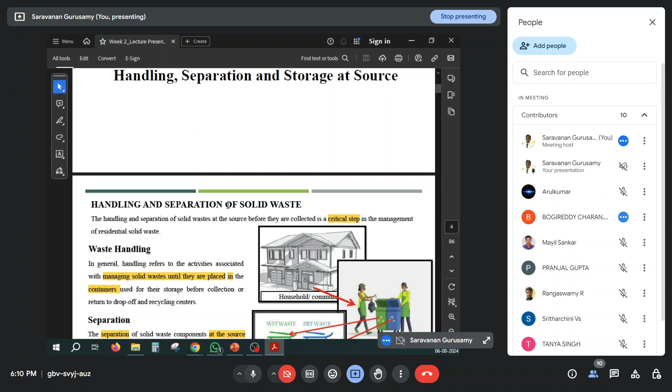So this slide discusses the handling and storage of solid waste. Waste handling is managing solid waste until it is placed in the containers. Once it is generated, until it reaches the containers or bins, how it is going to be handled in small dustbins or stored before collection, or returned to the drop-off and recycling centers.

And separation is at the source itself. It's not segregation at the material recovery facility; it is separation at the source. That's what we call source segregation. Source segregation is an important and positive aspect to achieve 100% recovery and recyclability. Once the waste is properly segregated at the source itself, it is easy to manage. That's the primary goal of solid waste management. So source separation and waste handling are very important at the source itself.

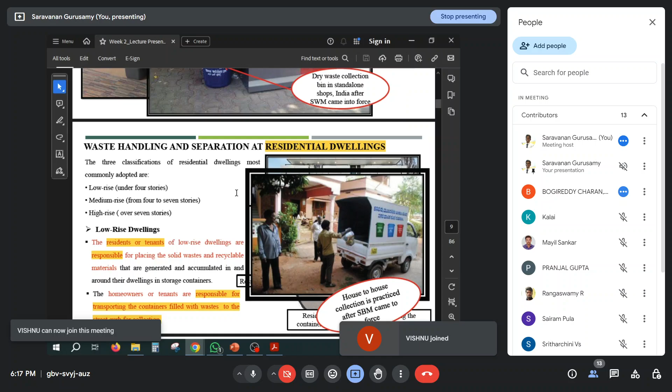So waste segregation in the commercial area, workplace, or the education institutions. So everywhere, based on Swachh Bharat mission and the fund allocated, this type of bins were placed. Yeah. Then waste handling and separation at the residential dwellings.

So as you know, dwellings is a kind of occupational area, that we will say as houses, our regular houses; that's the residential dwellings. So different types of dwellings, how to handle and separate the waste. So we have three categories. One is low rise, medium rise, and high rise buildings. So low rise is like a single house or a house with a single floor. And then medium rise buildings; high rise buildings are the apartments with the 7 stories. So these are all different categories, and how to handle waste at different dwelling areas.

So once it is a low rise dwelling, the residents or the tenants are responsible for placing the solid waste and the recyclable materials, and the homeowners and the tenants are responsible for transporting the container with waste to the street curbs for collection. Those who are in the villages or small municipal areas, they will know. When they are in single story buildings, the residents only will take the waste to the street, discard the waste in the vehicle, and then get back the bin to their respective home. So the residents or the tenants are responsible in low-rise dwellings.

So in the picture also you can see house to house collection is practiced, and the residents are coming and discarding the waste in the respective vehicle and taking back the bin to their respective homes. If it is a low and medium rise building like a 3-story or 4-story building, they have a separate waste collection system at the basement area. I mean the ground floor or G-1 floor, they have a separate area for waste storage, that's called basement storage, or outdoor storage, or occasionally compactor storage also they are following.

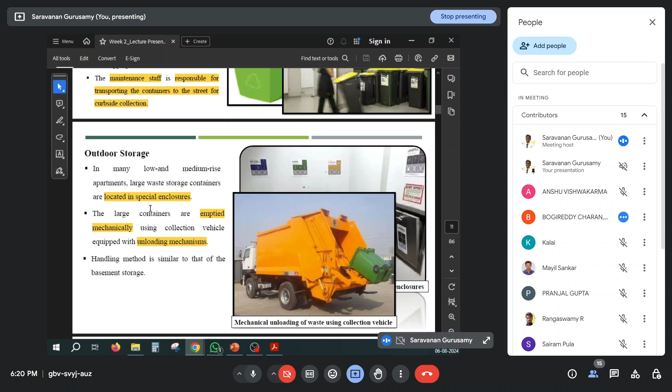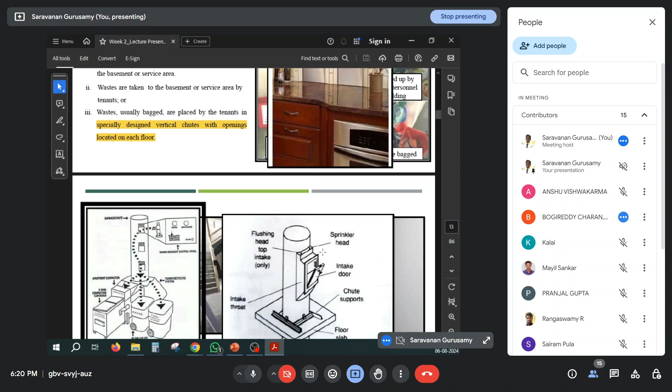Because if it is a single home, the people can easily carry the dustbin and empty it in the container. But if it is an apartment, the bin will be bigger in size and that should be handled mechanically. Yeah. If it is a high-rise building, like more than 7-story buildings, then they have a separate chute mechanism. So chute is the one which has an opening at your home itself, and you have to discard the waste at this opening. It will reach the basement or separate premises by a long elongated pipe mechanism. So these are all different buildings. Here one story, here one story, another one story.

So the people are simply discarding the waste into the chute, that is called a garbage chute. The chute will transport the discarded waste and it will be segregated at the basement area in different categories like paper, cans, plastics, and food waste. They will discard separately. So these are the mechanisms in the high-rise buildings. Yeah.

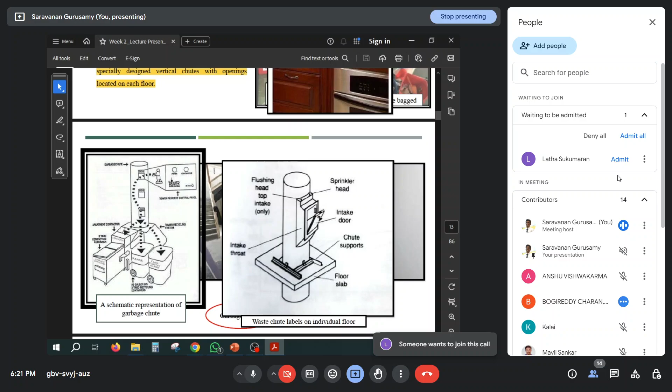How to store the waste? Now we have discussed how the waste is collected at the source itself. Now we are going to discuss how to store the waste. So storage will be affected by 4 factors. One is waste component. What is the type of waste? If it is food waste, we have to maintain it separately. If it is dry waste, we have to maintain it separately. And then type of containers. If it is a small container, it should be handled separately. If it is a big container, there should be a separate mechanical system required to unload the dustbins or the containers.

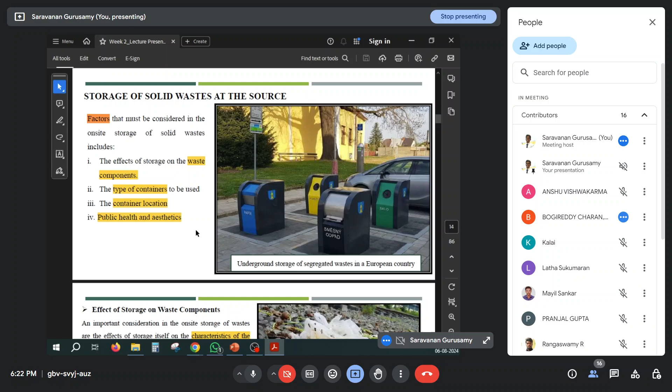And then container location. If the container is there within 250 meters interval, then the people will easily go and discard their waste in the containers. If the container location is far away, then the people will discard in the nearby area itself. So container location plays a major role. And then public health and aesthetics. These are the factors that should be considered for on-site storage. So if it is a disease-prone area, the container location should be outside the city. Then the people can be protected from infections.

So, effect of storage on the waste component: based on the characteristics of the waste, biological or microbial decomposition may happen in the organic waste, and it will form odors. It will attract flies, as I mentioned. It will create infections. Absorption of fluids: moisture from the waste will spread everywhere, and once the wet waste is mixed with the dry waste, the moisture from the wet waste will be absorbed by the plastics or papers, so they will also get contaminated. They cannot be recycled. So that is one problem, spreading of moisture.

Then it will reduce the value of individual components for recycling. Whatever could be recycled, the value of the recyclable will reduce once it gets contaminated with the other type of waste. Because of this problem, house-to-house collection of segregated waste is practiced after the Swachh Bharat mission came into force.

Then, type of containers. In this, we have two major classifications: one is the hauled container system, another is the stationary container system. When the container itself is taken by the vehicle to the disposal area or a material recovery facility, discarded there, and the container returned back to the place, it is called a hauled container system. The container itself is hauled. In a stationary container system, the vehicle will come to the location of the container, only empty the waste in the container, and return the container to its original place. The container will be stationary at the place itself. It won't move. But in the hauled container system, the whole container will be lifted onto the vehicle and transported to the disposal area.

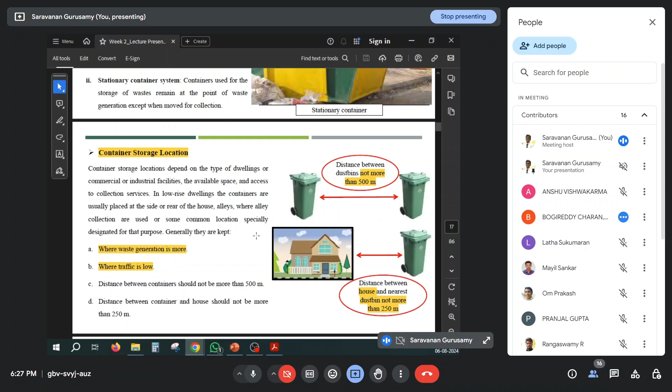Distance between containers will also be taken care of while designing container storage locations. Another factor is public health and aesthetics. Infection prone areas we have to avoid for container locations, since solid waste with vermin and insects often serves as a potential disease vector.

Some solutions include proper sanitation. You can see here how waste was collected underground using waste collection bins in Europe, with lids and periodic washing. Proper closure of the containers is a major aim, because if the container is not closed, it will automatically create an aesthetic issue and spread diseases through vectors.

You have to properly lid the container with tight lids, and periodically wash the containers and storage area using the municipal crew. Aesthetic consideration should also be taken care of.

Here comes container capacity - how much capacity should be for a container. For a single household family with 5 members, a container of 12 to 15 liters is enough. You can assume how much it will be - 12 to 15 liters is like half a bucket, it's like a normal dustbin size.

For each dry and wet waste, that is important. So you have to have one blue bin and one green bin for dry waste and wet waste respectively, each of 12 to 15 liter capacity.

If the collection takes place daily, that is another important factor. If collection happens only once every 2 days, then the capacity of the container should be doubled. So once collection is happening daily, with a 5 member single household family, for each dry and wet waste we can have 12 to 15 liter containers.

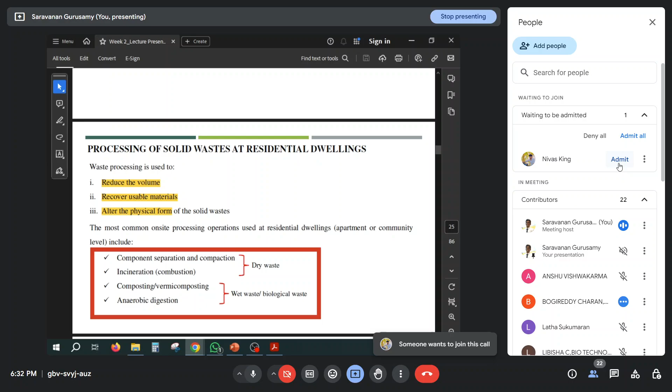First, component separation, as I mentioned for dry waste. Recoverable and reusable materials can be separated at the source itself to recover energy and convert the products. This can be easily achieved by source segregation. If it is mixed with wet waste, we can't recycle it. So dry waste should be segregated at the source itself. This is a major point I will repeat in all the slides: source segregation is very important.

From an economic point of view, at a household level, it's uneconomical at the small scale. But at a community level, you can think about source segregation and compaction.

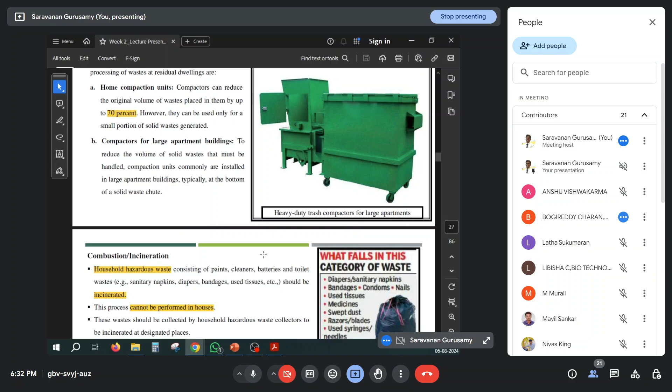In India, you can see lots of what we call kabadi walas. Kabadi walas come to your home and collect recoverables like glass bottles and plastics. Our mothers easily give this type of waste and earn some money. This type of household segregation and recycling could be achieved through source segregation.

Then compaction at the home itself. If it's high-rise buildings, we can easily compact the waste, reducing its original volume by 70%. As mentioned, 100 kg can be reduced to 30 kg by compaction, and it can be easily transported. Once the volume is 100 cubic meters, the container or vehicle required for transport of the solid waste will be huge. So if you compact the waste, it can be easily transported.

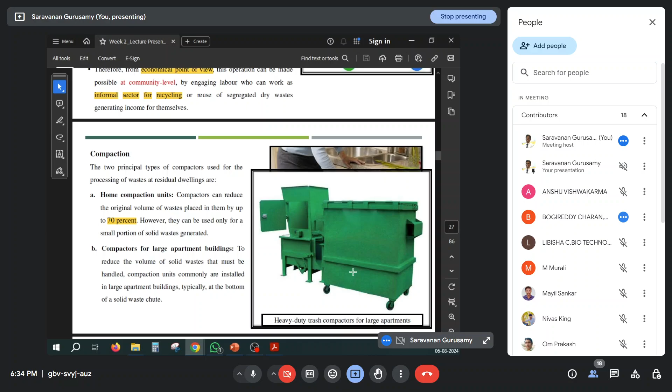Then compactors for large apartment buildings and small apartment buildings, you can see these images: heavy duty trash compactors, and then shredders. Shredding and compacting is also followed in high-rise apartments. So this is one option, source segregation and compaction, for dry waste.

Another dry waste option is combustion or incineration. This can be followed for domestic hazardous waste, that is, household hazardous waste in the yellow bins. The only option for hazardous waste is to combust or incinerate it, because it can easily spread diseases and contaminate other waste due to toxic contaminants. So the only way to manage hazardous waste is by incineration or combustion, to make it ash and reduce the toxic elements present in it.

This cannot be performed at the household level. At a community level, a municipality can design an incineration plant. So once the waste is collected in the yellow bin, it can be easily transported to the incineration plant. The process technology for sanitary waste includes incineration and autoclaving.

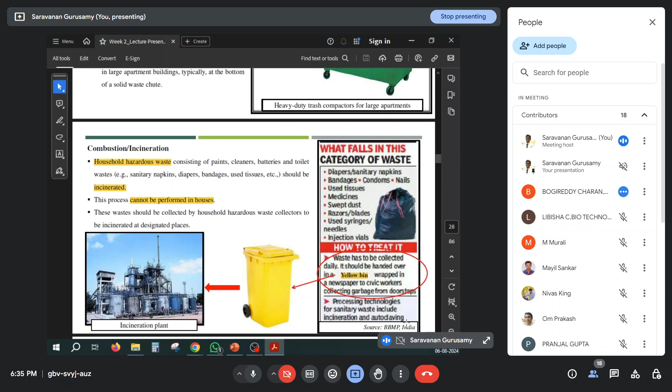As you all know, autoclaving is a technology using high pressure and high temperature. It's a sanitation method to inactivate the microbes present in the solid waste, so there won't be any biological or infectious bacteria or virus remaining active. That's the process of autoclaving - at high pressure and high temperature, we can reduce the activity of the microbes.

So that's all about dry waste. For wet waste or organic waste, we can adopt composting. You all know what composting is - it's the process of degradation of solid waste, or the organic fraction of solid waste, by the use of microbes. So microbes will degrade the organic fraction of solid waste. There are two options.

One is with oxygen, another one is without oxygen. If it is with oxygen, it is called composting, or without oxygen, it is called anaerobic digestion. So that's the difference.

So here we are producing a product that is called compost. This is a good soil enricher.

We can use it, we can apply in the agricultural field to improve the fertility of the soil. So we can do this type of composting in the household or community level also. So many village panchayats or many municipalities are having compost plants. In my hometown itself, we have 3 compost plants.

You can also visit a compost plant in your premises, in your hometown, or you can also visit the compost plant in your institution. In NIT Trichy, we have a compost plant. So we can also go there, and they are doing it for hostel food waste and garden waste, that is the fallen leaves. And then we have a horticulture garden.

So there also, whatever waste they are getting will be treated in the compost plant only. We are getting compost as a byproduct that we are again applying in the garden itself to enrich the soil fertility. So there are 3 stages.

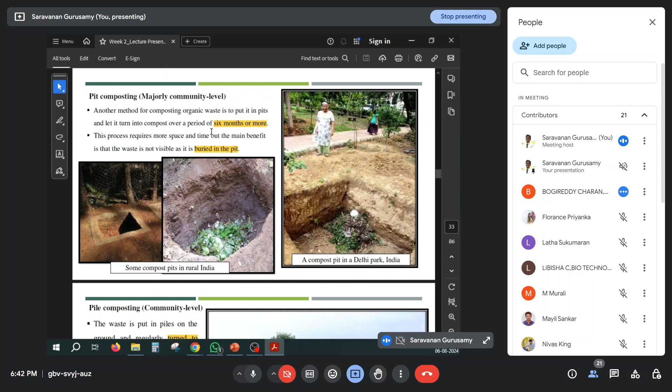This will reduce the volume of waste to be collected and treated, and the volume of waste reaching the dump site will also be reduced. So this is a good practice if you have a large backyard. This is called pit composting; we can also do it at the community level, but it will take lots of time because the waste is buried and has no oxygen supply, so it will take 6 months or more to become compost.

Then pile composting. Pile composting we can do at the community level. The waste is spread in the form of a cone, extended over a length, and turned every day with a separate piece of equipment called a turner, or shaker. The waste is turned every day to allow proper aeration. It will have a width of 1 to 2 meters on each side and not more than 1.5 meters in height.

In Germany, you can see this type; another name for this is windrow composting. The shape we call a windrow. So this is windrow or pile composting, which we can do at the community level. So these are the four composting types we have discussed.

What are the advantages and disadvantages of household level composting? First is household compost production, a byproduct we are producing, and it will encourage organic farming and reduce the amount of waste that needs to be collected and managed. As I mentioned, the waste disposed in the dump site will get reduced once we adopt this kind of source treatment.

And the remaining waste is clean and easier to recycle. Once the organic waste is collected in a separate bin and composted, only the dry waste will be collected by the municipal crew, and it can be easily treated and recycled. So that is one advantage.

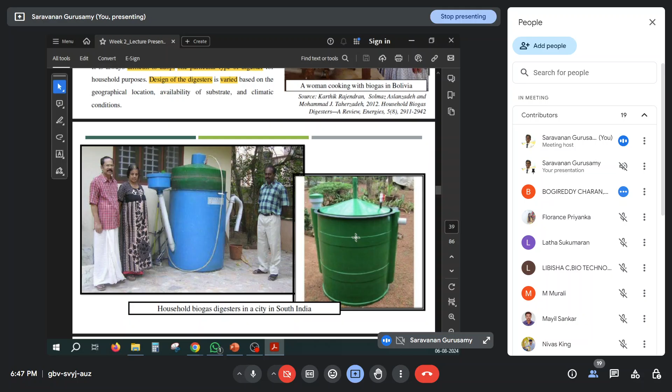You can see here a biogas digester in a city of South India. This is one type of household biogas digester. And here you can see a community level floating drum biogas plant. The gas will be collected at the top, and it can be transported through a pipe to the kitchen to be used as a fuel. At the community level, there will be a floating drum because the amount of methane produced will be more. So it can be collected in an iron drum, floating on water at the bottom.

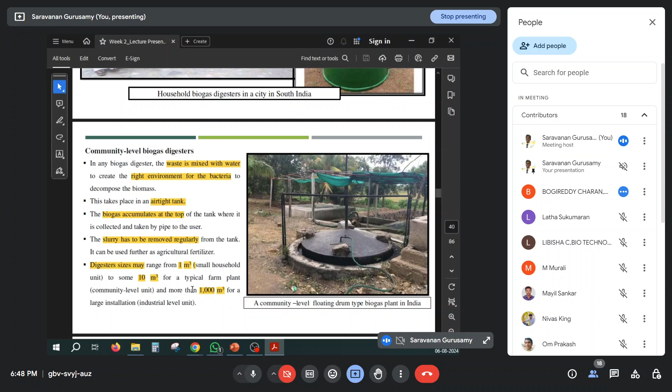Whenever the methane rises, it will raise the cylinder to the top, and the gas can be collected through the pipe. Again, it will drop down. This is the basic principle of the floating drum type biogas plant. Here you can see numericals, like what size and height it should be. Proper mixing of water is required for an anaerobic digester, and the right kind of environment for the bacteria. It should be airtight because it is anaerobic; the biogas accumulates at the top, and the slurry can be removed from the bottom regularly. This slurry is rich in microorganisms and can be used as a compost.

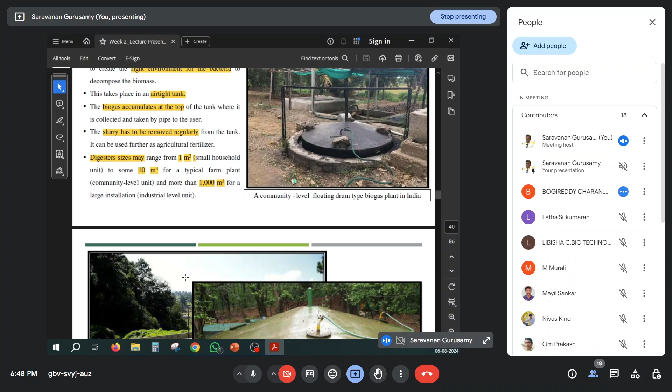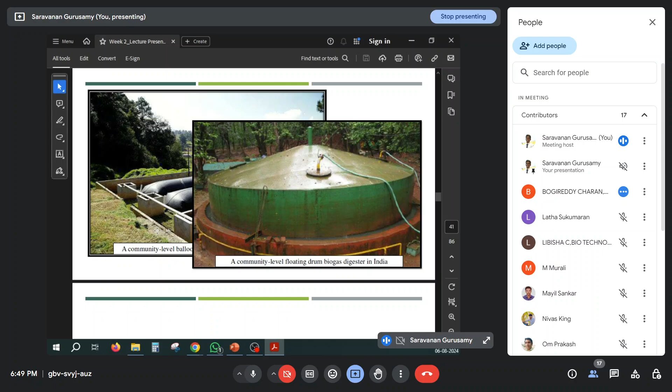And this is another community level floating drum biogas digester. Here you can see water at the circumference, and inside you can see a mixture of waste and water in anaerobic condition. The drum floats to the top because it has a huge accumulation of methane. Then the methane is collected through the pipe into a separate bag, in the back side. You can see balloons. In balloons also we can collect this methane, and it can be transported easily.

So now we have discussed how the container can be designed and how to design the location of the container. Then we discussed how to treat the waste at the source itself, if it is wet waste or dry waste. Then after treatment, how to collect whatever leftovers, through primary collection and secondary collection, we are going to discuss.

So here we are going to discuss the collection vehicles and the collection system. Waste collection is the term used for collecting the solid waste from various sources, but also the hauling of this waste to the location where the contents of the vehicle should be emptied. The location can be a material recovery facility, a treatment plant or a dump site. So the stage in between, from the source to that location, is called waste collection.

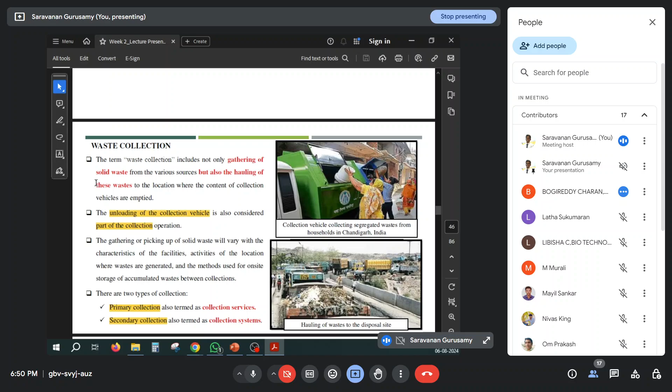So there are two types. One is primary collection, another is secondary collection. The primary collection is also called collection services, and the secondary collection is called collection system. Because the collection services is for every household or a community level, and the secondary collection is for the whole municipality. So that is from the smaller trucks to the large vehicles. That is called secondary collection, or from the transfer station to the disposal site. So that will also be in the secondary collection only.

So we are going to discuss about the primary collection or the collection services from the source of segregation, how to collect from there to the disposal site or the transfer stations. So we have different types of collection services, out of which four are major. First is curb service. Second one is alley service. Third one is set out setback service. Fourth one is only set out service. So these are all four types of services we are going to discuss.

So curb service is the one where the homeowner or the resident is responsible for placing the container at the curb. Curb in the sense you can see a big container placed at the end of the street. Every street you can see this type of green color or big municipal bins. So the house owner or the resident should go and place the container at the curb, and the house owner should return the empty container to the storage location or to their home until the next collection. So this is called curb services.

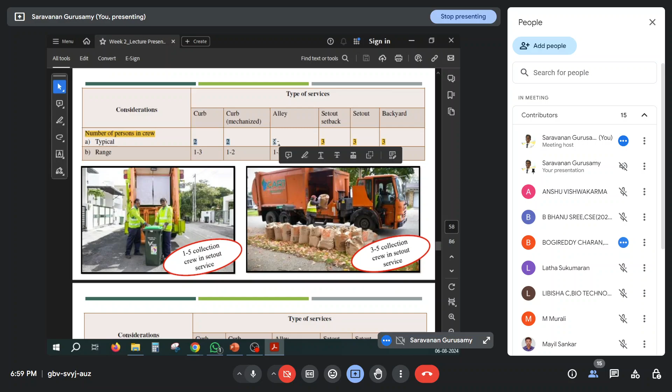The number of crew persons required for door-to-door collection is higher, because many people have to come to take and then return the empty container. Three or more people are required. But in curb and alley, only one or two people with mechanical equipment is enough to handle bigger containers.

And then crew time will be higher for set out, setback, because they have to visit every household. It's not like a simple dustbin at the end of the street. It is like every door to door. So crew time will be higher for set out, setback. Injury rate also will be higher for set out, setback, because they have to meet every household.

And then trespassing complaints: for curb and alley there are none, because everything is at the end of the street only. But in set out, setback, there will be complaints and special considerations, and then cost is again higher for door to door collection. So this discusses the primary collection system. Then we are going to discuss the secondary collection system.

In the secondary collection system, like from the bin to the smaller vehicle, then the smaller vehicle to the bigger vehicles, how we are going to collect, that's what we are going to discuss. If segregation is not there, again it will create aesthetic issues. So source segregation is very important. It will be emphasized in all the slides. Waste spillage, you can see, will again create aesthetic issues and disease spreading.

So after JNNURM, that is the Jawaharlal Nehru National Urban Renewal Mission, was launched in 2005, more funds were allocated for solid waste management alone, and more hauled containers were kept in different locations of the country. The hauled container became the major focus of this program.

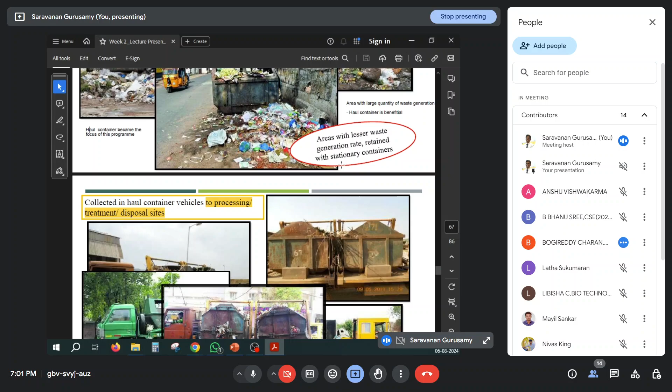They kept a large container on all the streets of the cities, and the vehicle will come, take the container onto the vehicle itself, and go to the disposal area. It will empty the container and bring the empty container back to its original location. This was the hauled container, and areas with large quantities follow this hauled container system. Areas with lesser waste generation rates retained the stationary container system.

So for collection vehicles, you can see two-bin container vehicles and mechanized stationary container vehicles. After Swachh Bharat Mission, which emphasizes collection of high volumes of waste, compactor vehicles were introduced because everything is door to door. So more waste will be collected, and it requires compactors to reduce the volume. The vehicle itself will have the compactor. It will reduce the volume of the waste, which took into account the cost factors. Again, it will increase the cost of waste management.

But compaction of unsegregated waste led to corrosion inside the vehicle. So the vehicle will be easily corroded, and it will increase the cost of purchasing new vehicles. This is the problem with compaction of unsegregated waste. If the waste is segregated, compaction is good. For dry waste, compaction is good. Compaction of unsegregated waste leads to corrosion of the vehicles. So segregation of waste at source was found to be of utmost importance for compaction vehicles.

So as I mentioned, the secondary collection system was divided into two. We are going to discuss the hauled container system mechanism and the stationary container system mechanism, how the vehicle is collecting to the final disposal site. Problems related to this we are going to discuss next week. The hauled container system is HCS. Containers used for storage of the waste are hauled to the MRF, transfer station or disposal site, and the empty container is returned to its original location. It is ideally suited for places with high waste generation.

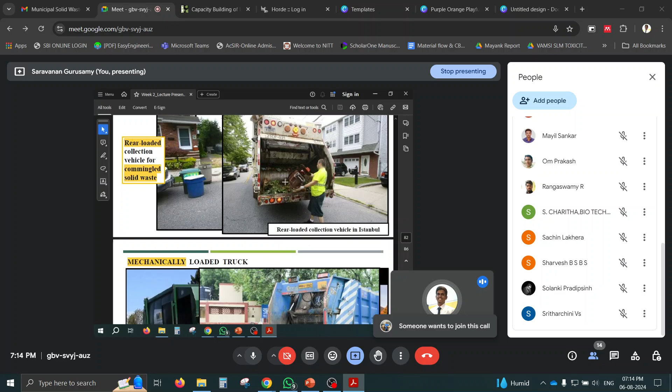Rear load for commingled waste - this is for source segregated waste, this is for commingled, meaning mixed waste. And then there are mechanically loaded trucks.

The advantage is higher utilization rate, because even if the container is not full there is no problem, since whatever waste is in the container gets taken to the vehicle. If the container is not full, no issue, the vehicle will move to the next location. But in the hauled container system, whatever waste is in the bin, that must be transported to the disposal site. So that's the problem in the hauled container system.

The disadvantages are: not suited for heavy industrial waste, difficult to service door to door for high volume of rubbish generated. In the manual system, more manpower is required, and special attention should be given to design the collection vehicle and the collection driver.

So we have come to the end of the presentation. Today we discussed the types of containers used at the source, how source segregation is done, the different colors of bins, the different aspects to consider when designing bin locations, how primary collection takes place, how secondary collection takes place, and the different types of secondary collection like hauled container and stationary container systems.

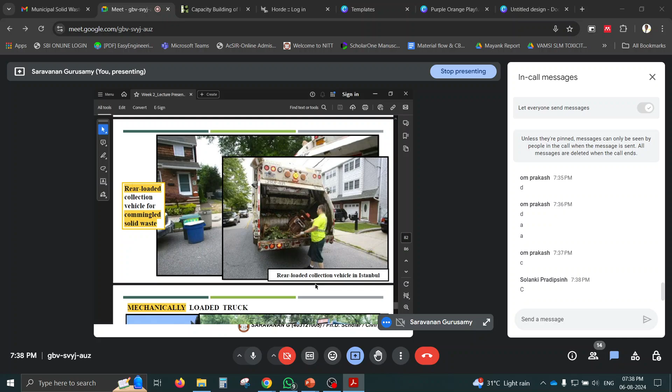Here, container capacity for a single household family of 5 members: a container of 12 to 15 liters each for dry and wet waste. That is again important. If the collection takes place daily, there should be 2 bins required, each of 12 to 15 liters.

Waste processing does not include... I have mentioned this in the slide itself. Waste processing requires volume reduction, change in physical form, change in chemical form, and recovery of usable material. So what does not include?

The answer is: waste processing requires volume reduction - that's correct, volume should be reduced. Physical form should be changed, valuable material should be recovered. But chemical form will not change, because with any waste, only the physical form like density and moisture content will change, not the chemical property. The carbon, nitrogen, hydrogen cannot be changed with waste processing. So option C is not correct.

So waste processing is used to reduce the volume, recover usable material, and alter the physical forms. That can be done with these four processing technologies.